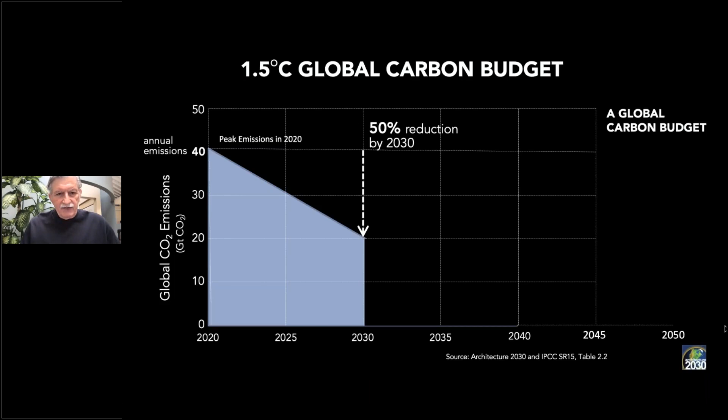Most scientists are calling for a 50% CO2 emissions reduction by 2030. If we follow that line down, if we meet that target, then we phase out CO2 emissions by 2040. That gives us a 67% chance of meeting the 1.5.

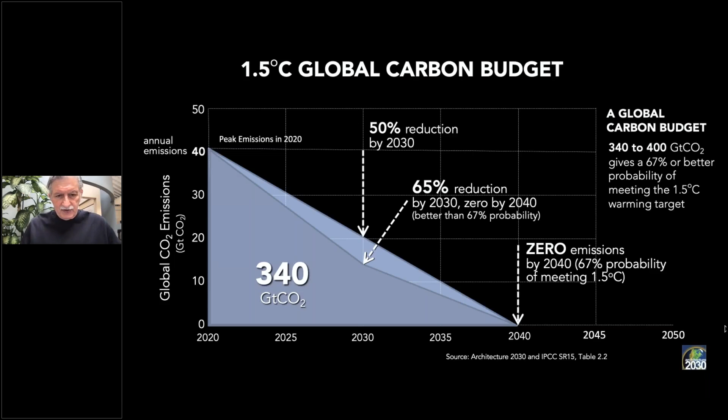That's a good probability. And we think the building sector, our sector, can do even better. We can reach a 65% reduction by 2030 and phase out all emissions in the building sector by the year 2040. So a 50 to 65% reduction by 2030 works, and then a phase out by 2040. That's our carbon budget.

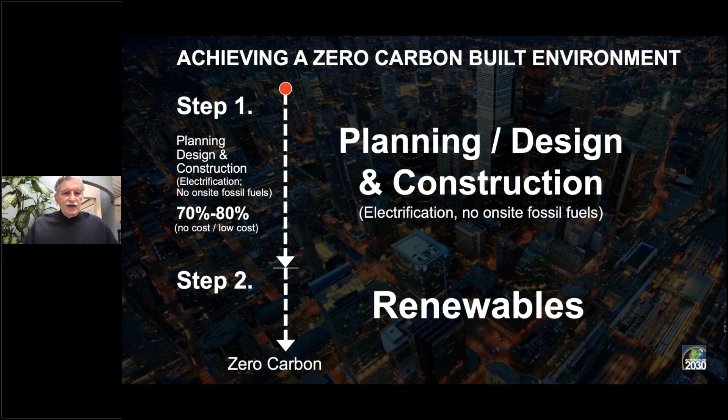So how do we achieve a zero carbon built environment? That's buildings and the infrastructure that goes along with it. Well, it's a two-step process. Step one is planning, design, and construction. It's what we do. And there we call for electrification, no on-site fossil fuels. Step two is adding the renewables. If we do those two things, we get through planning and design 70 to 80% of the way there. And then step two, we add the renewables, we can get to zero carbon.

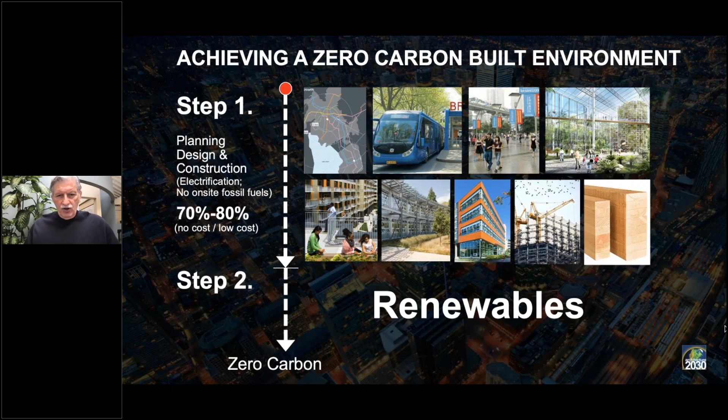So how do we do that? Well, if we plan correctly, for example, establish growth boundaries so we're not increasing the infrastructure, infill, use public transportation, bring urban agriculture back into the city, design buildings using passive heating, cooling, and daylighting systems, and then use the appropriate materials, reducing the embodied carbon of materials, and even using carbon sequestering materials, we can get 70 to 80% of the way there just through design strategies, no cost or low cost options and strategies that we have.

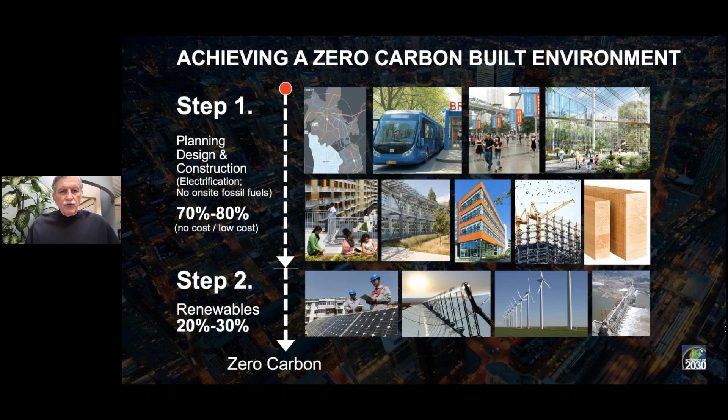And then step two, we then need to power the rest of the building's needs with renewables, and that's on-site renewables or bringing in electricity, for example, from offsite locations that are powered by renewables. So that's how we get to a zero carbon built environment.

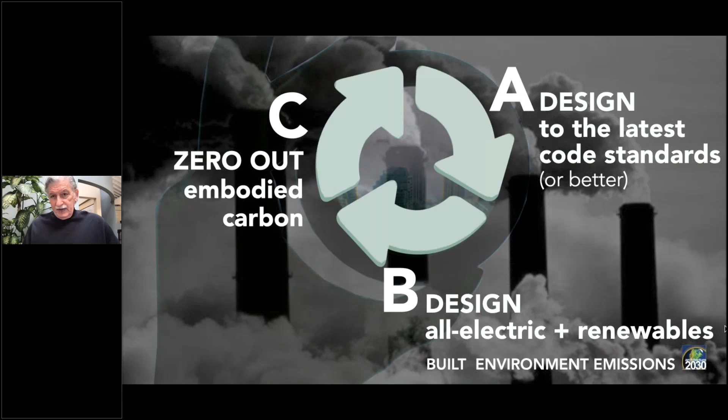So how do we actually do it? Well, there are 3 steps to doing it. Step A: design to the latest building code standard or better. Why? Well, first of all, we have zero carbon building code standards that get us very, very low carbon operating energy. ASHRAE 90.1 2019 is an excellent code.

The IECC 2021. China has a nearly zero energy buildings code, plus on-site and off-site renewables. Many European countries now are required to get to nearly zero energy plus on-site and off-site renewables. So we have the standards out there, we have international standards. And if we just design to the latest code standard, then we get a very efficient building.

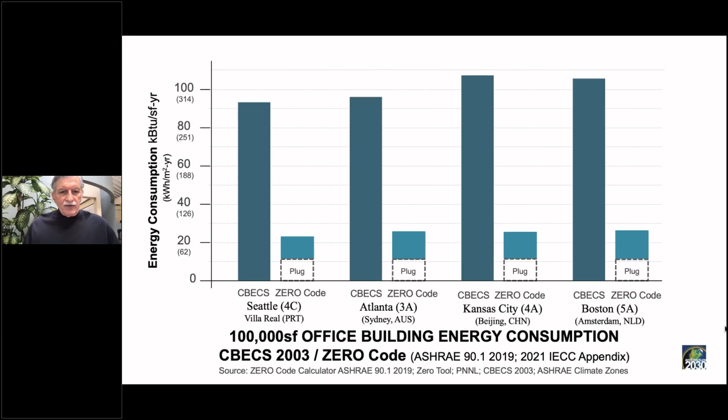So the part that the code addresses is a very small portion. We can easily address the building's energy consumption because it's very low with renewables. The first thing is to design an energy efficient building using at least the latest code standards, and then do all sorts of things to reduce it even more—look at the envelopes, make them more efficient, daylighting strategies, passive heating, cooling, and ventilating strategies that don't cost anything can bring efficiency way up and energy consumption way down.

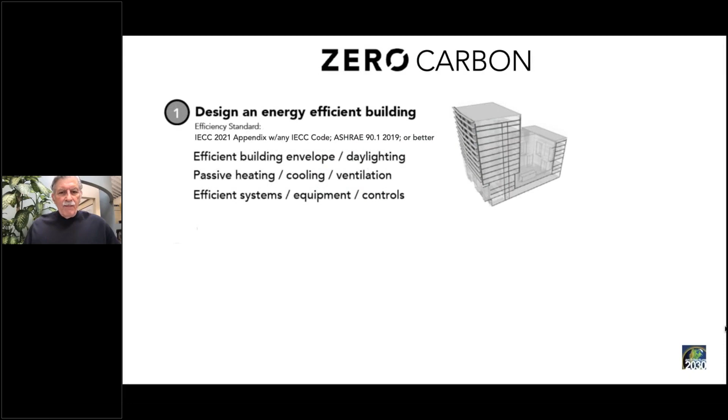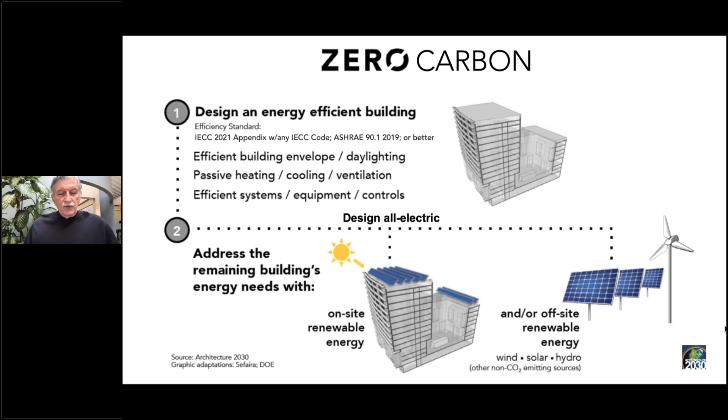The second thing we need to do is design all electric, plus renewables, no on-site fossil fuels. We design all electric, address the remaining building's energy needs after we've designed an efficient building with either on-site renewable energy when we can, or bring in energy off-site from renewables. We insist on renewables—that gives us a zero carbon building.

What about all the existing buildings out there? The formula is the same. When we renovate them during renovation cycles, we can make them more efficient, get rid of the on-site fossil fuels, electrify them, and then bring in on-site or off-site renewable energy.

And we discovered something really interesting. This is an aerial view of New York City, and you can see in those red circles where all the big buildings are—over 50,000 to 100,000 square foot buildings in Midtown Manhattan, downtown Brooklyn, downtown Manhattan. Those small circles represent only 2% of all the buildings in New York City. It's a very small number of buildings.

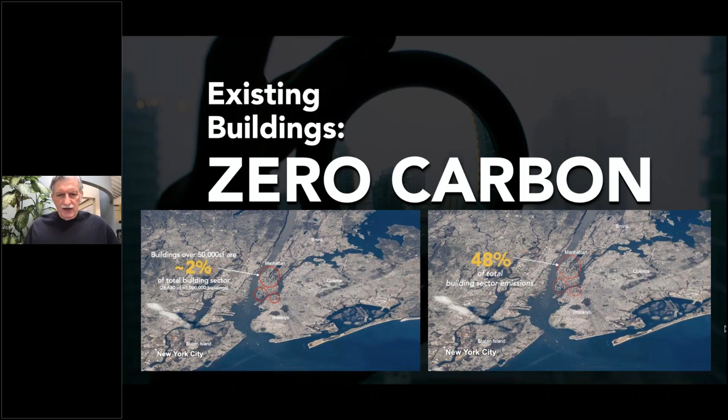That small number of buildings is responsible for 48% of all building sector operations emissions. It's huge—a very small number of buildings responsible for a huge portion of the city's building sector emissions. We can see the same thing in Chicago along the waterfront: very big buildings, then miles and miles of small buildings.

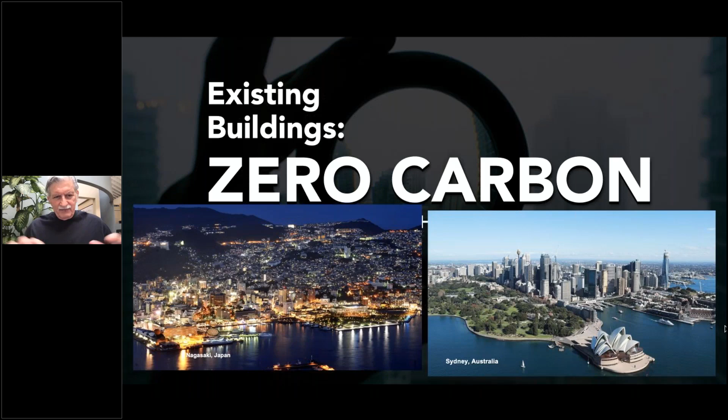Same thing in Philadelphia, same thing in Guangzhou, same thing in Istanbul, Turkey—downtown areas with some huge buildings, then lots and lots of smaller buildings. You can see the same thing in Nagasaki, Japan, along the waterfront: huge buildings, and then in back of it miles and miles of small buildings. Same thing in Sydney, Australia.

Based on that, we can develop a two-tier, two-part strategy. First, with the big building emitters—there are very few of them in each city, but they're responsible for almost half of all emissions. So we work our way down from the biggest buildings until we get to half of emissions. It'll be a relative handful of buildings, and we require them to get to zero carbon by the year 2030.

We provide incentives for them to do it. They'll usually hit a capital improvement cycle, so it'll be inexpensive to get rid of on-site fossil fuels, electrify, and use on-site and off-site renewables. We can give them low interest loans, tax abatements—there are all sorts of things cities and local governments can do.

And then we require all the rest of the buildings to get to zero carbon by 2040. We give them more time—these are the smaller buildings. We look for times when they're going to undergo a renovation. So getting to zero is not that difficult and doesn't cost very much.

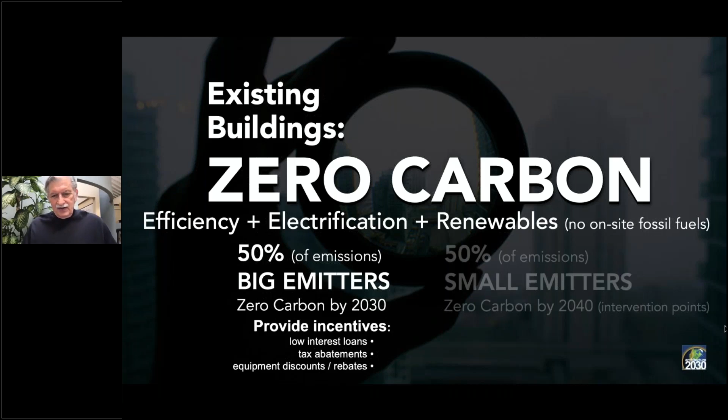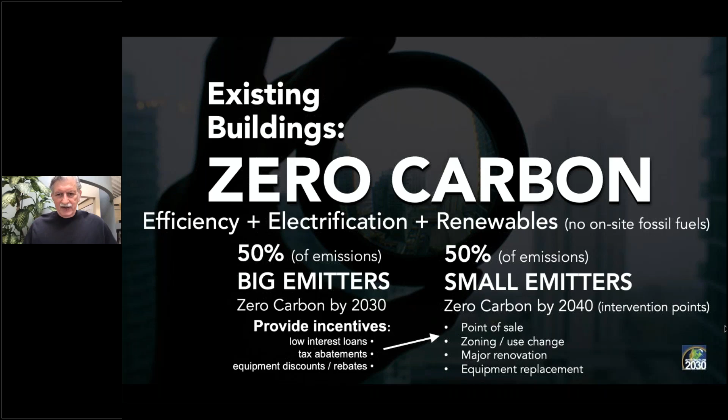At point of sale, a zoning or use change, when they undergo a renovation, or when they're replacing equipment—replace it with more efficient equipment, electrify, and get rid of on-site fossil fuels, and give them the same incentives to do that. If we do that, we can transform the entire existing building sector to get to zero carbon by the year 2040. And then last but not least, we have to zero out embodied carbon.

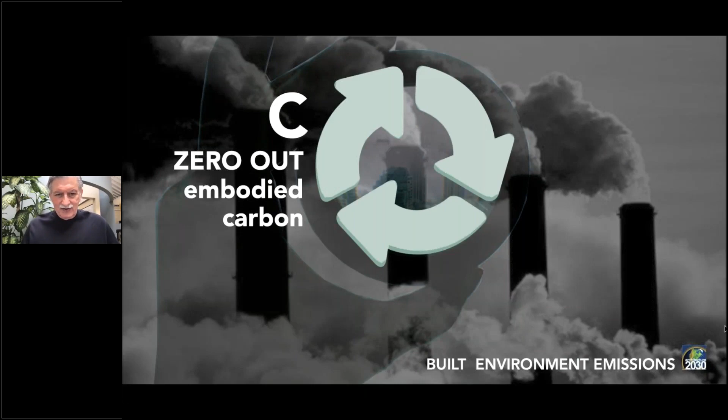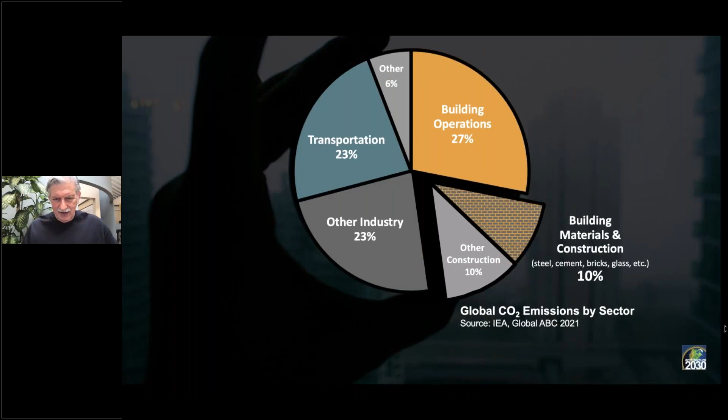All the materials and construction that goes on in the building sector—there are literally hundreds of thousands of materials we can choose from. So how do we zero out all that? We discovered something interesting. Here's the way we usually see global emissions now. And if we reconfigure the industrial sector, we see that just two materials, concrete and steel, are responsible for almost half of all emissions in the industrial sector.

Most of that concrete and steel and emissions come from building buildings and all the infrastructure that goes along with buildings—the roads, the site work, the parking lots, the bridges. All of that is attributed to the built environment.

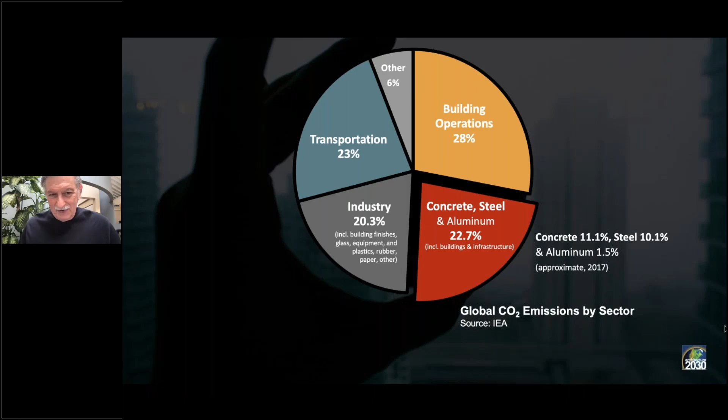So just two materials are responsible for half of all industrial emissions, and if you throw in aluminum, it's over 50%. You have two materials, and then hundreds and millions of other materials and products. In a building, it's the structure, the concrete and steel, that makes up 50, 60, as much as 75% of the total emissions of building the buildings.

If you renovate a building, you don't have to build all that new structure. Keeping existing buildings and renovating and reusing them is really the greenest building. It's the one you don't have to build—it's already been built.

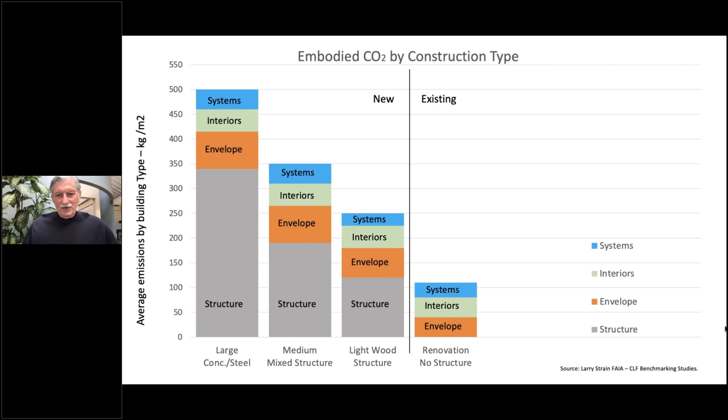So now what? How do we get a handle on steel and concrete and then all these other materials? Well, the first thing is we have to change the conversation. And that conversation has been changing. Recently we discovered that steel and concrete was responsible for this huge amount of emissions, followed by aluminum and glass. We're starting to see that now in mainstream media.

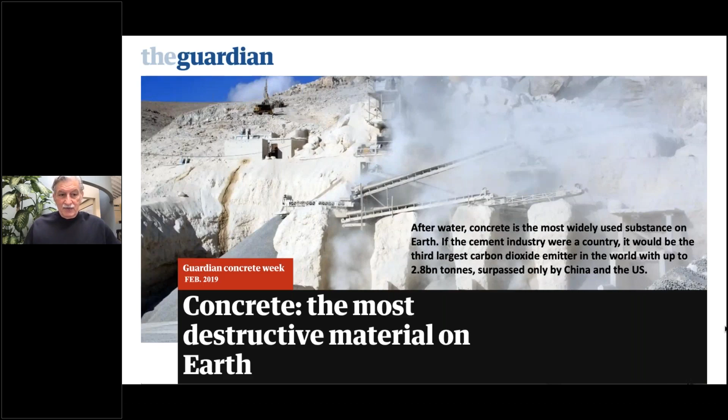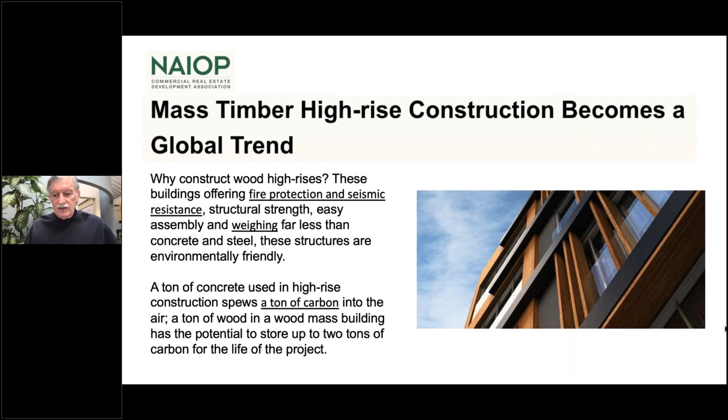Concrete, the most destructive material on the planet, from The Guardian and Bloomberg. Steelmakers next in the crosshairs as climate pressure grows. And there's an alternative: mass timber. We can use mass timber, cross-laminated timber, glue-laminated timber. We're starting to see now cross-laminated, glue-laminated bamboo in the global south being discussed. This gives steel and concrete competition, so it incentivizes them to change and become low carbon.

So what can we do in the design, planning, and architecture professions? We can look to reuse when we can, reduce and sequester carbon. Let's look at reuse—like I said, the greenest building, development, or neighborhood is the one that's already built. If we can repurpose and upgrade urban areas, that's better than tearing them down and building new. When we can do that, we can also renovate existing buildings through adaptive reuse.

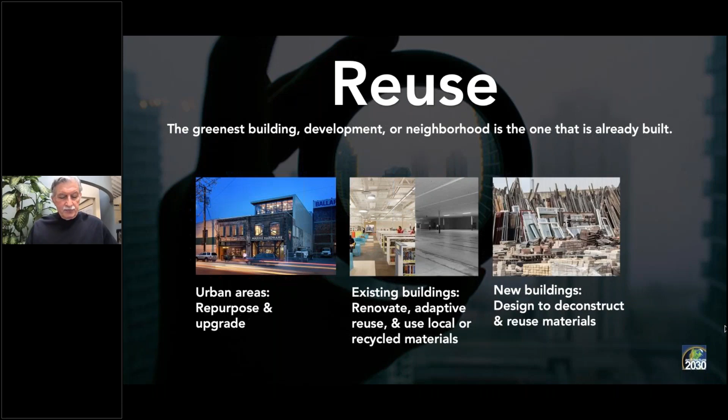We'll see a lot of that because of COVID, and use local or recycled materials. And if we do design new buildings, then we can design them to be deconstructed later on after their usable life, to reuse materials. That's becoming now an option within the architecture profession.

The second thing we can do is reduce, by establishing growth boundaries and infill. There's usually a tremendous amount of area that can be infilled and densified. We know that's not a COVID spreader, by the way—it's overcrowding. So we can infill and save all that infrastructure.

We can optimize structure—we usually over-design now anyway—and then we can specify low carbon materials. We're calling for an immediate 30 to 40% reduction in our specifications when we specify materials, and then a 50% reduction by 2030, zero by 2040. But we should get concrete and steel to zero carbon as quickly as possible, preferably by 2030.

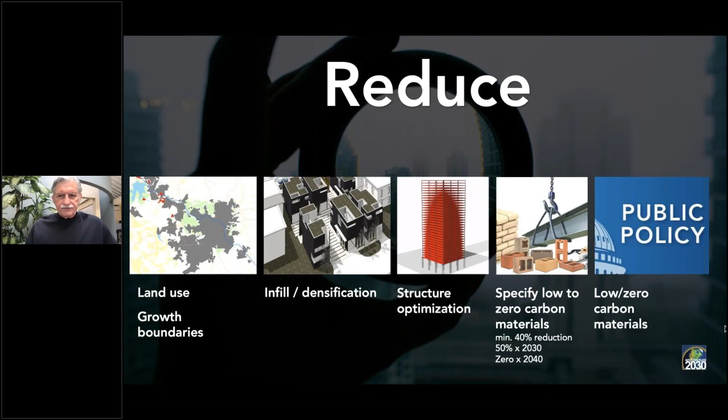We're beginning to see public policy now come into play with that. And the last thing we can do is sequester carbon—use sustainably managed forests, sustainable glue-laminated wood, and possibly bamboo. We're beginning to see the concrete industry and steel industry change. There's carbon positive aggregate now for concrete, injecting CO2 into concrete and changing its properties, so we reduce the amount of CO2.

Going to electric arc furnaces and renewable energy for making steel with recycled steel, using biomaterials with renewable energy to actually make the materials, and then sequestering carbon in landscapes and soil and site work, and bringing agriculture into urban areas can also sequester a huge amount of carbon and reduce transportation.

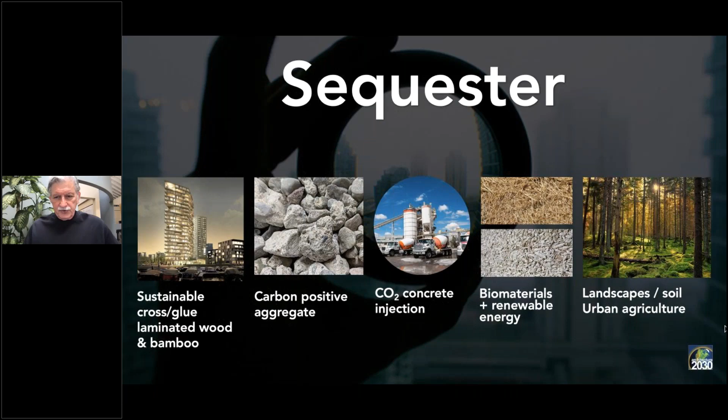So how fast can we make this change? We have to make this change really in the next 18 to 20 years.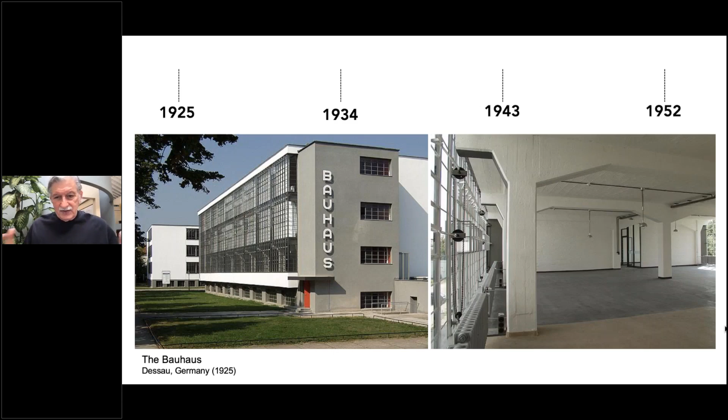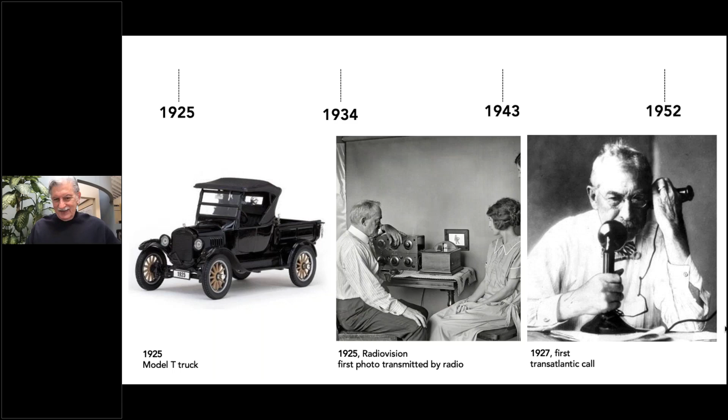That was in 1925. What was going on back then? Well, you can see things were pretty primitive in 1925. We had Radiovision, we didn't have television. We had the first Model T truck, for example. You couldn't make calls overseas. We didn't have cell phones, obviously. It wasn't until 1927. So things were pretty primitive back in 1925.

Well, in 1928, conditions were really bad. The architects, the leading architects and planners and designers got together and held the first international Congress of Modern Architecture.

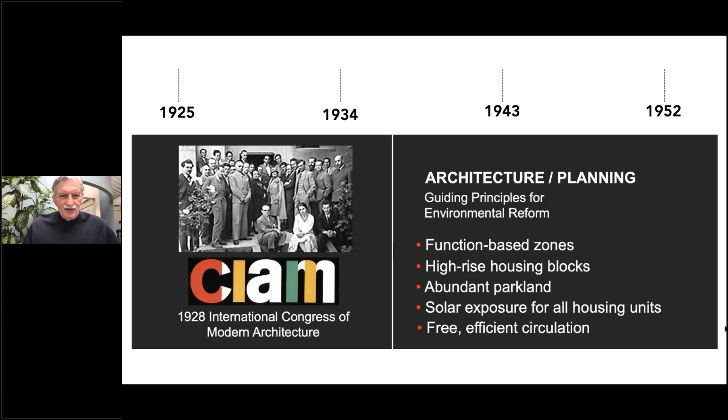And they were responding to terrible conditions in Europe during the beginnings of the Industrial Revolution. Housing was in the industrial areas, and pollution from burning coal, for example, was terrible. People were dying early.

The architects and planners and designers got together and set out guiding principles to get housing out of the industrial areas. They called for function-based zones and high-rise housing blocks and abundant sunlight, solar exposure for all housing units, putting the housing units in parkland, things like that.

So they set out these utopian principles, essentially for environmental reform. And Le Corbusier then set out the 5 principles for a modern architecture: column wall separation, get rid of the

bearing walls, for example, or free up the facade so that you can open it up and open up windows to the outside. The horizontal window, free up the design of the plan so we can have flexible space. And he called for roof gardens, actually replacing the vegetation we took by building the buildings and putting it back up on the roof. Interesting.

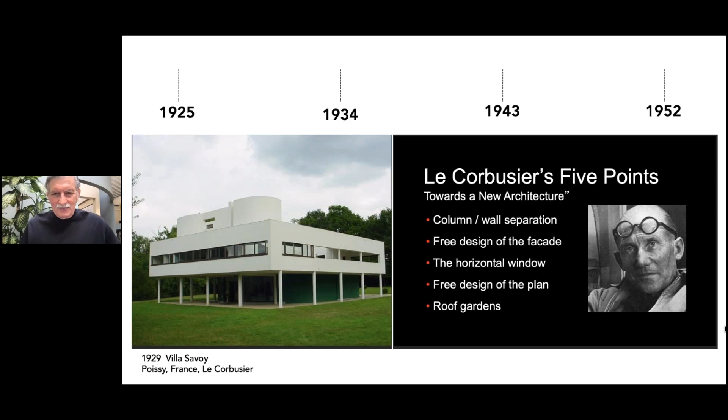So all that happened in 1928, 29. By 1932, that European movement of modern architecture came to the U.S. in an exhibit called the International Style.

And the reason being, you could take that building type, that modern building, and put it anywhere in the world because we have fossil fuels, they were cheap. You can climate control any space. So by 1939, you could see the beautiful Johnson Wax building, big open floor space with column loads.

By 1949, you had the all glass house in a very, very cold climate, a single glass, all glass house in a cold climate in Connecticut, New Canaan, Connecticut, the Philip Johnson Glass House. It was demonstrating that essentially we can build all glass and climate control the building to where it was comfortable because we had fossil fuels and cheap fossil fuels.

By 52, you had single glass high-rise buildings throughout the world. So here's the beautiful Lever House. And then by 56, you had entire new cities planned on the modern principles.

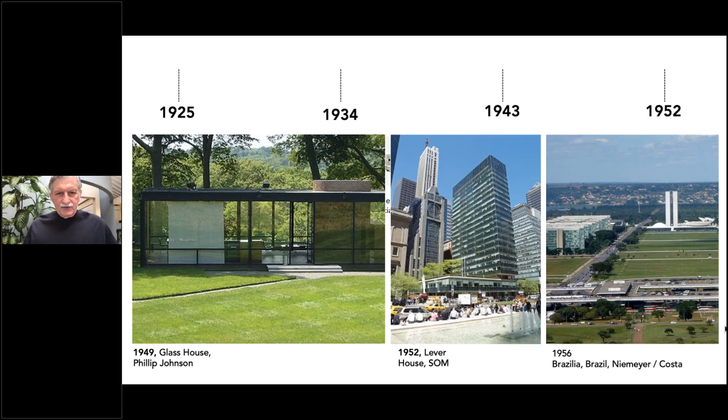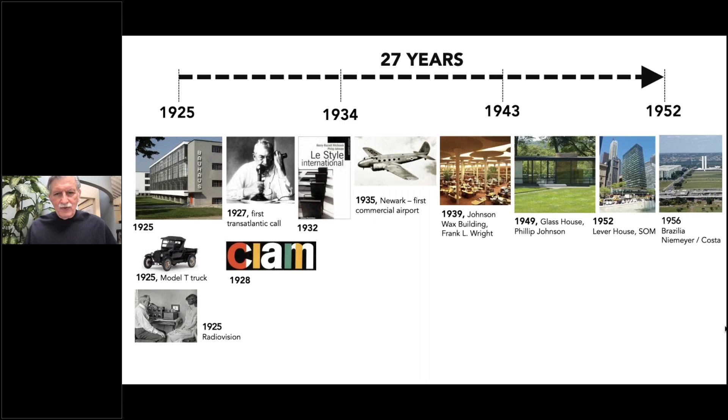So how long did it take to go from the Bauhaus to the Lever House? From 1925 to 1952 was 27 years. We changed the world in 27 years with these primitive tools that we had, T-square and triangle.

It took years to do a set of construction documents. We had to dip a pen in an inkwell in order to draw, and we didn't have erasers to erase the ink. We had to scrape it off a drawing with a razor blade. This is how we changed the world in 27 years.

You couldn't do a curve because you couldn't dimension it. So you had French curves, but you couldn't dimension it and put it in 3 dimensions. So everything was rectangular. Every building in the world during that period pretty much was rectangular.

It wasn't until 1960 that we actually got a pen to draw with, a rapidograph. And the first laptop didn't come in until 1991. So we changed the world in 27 years with these primitive design tools.

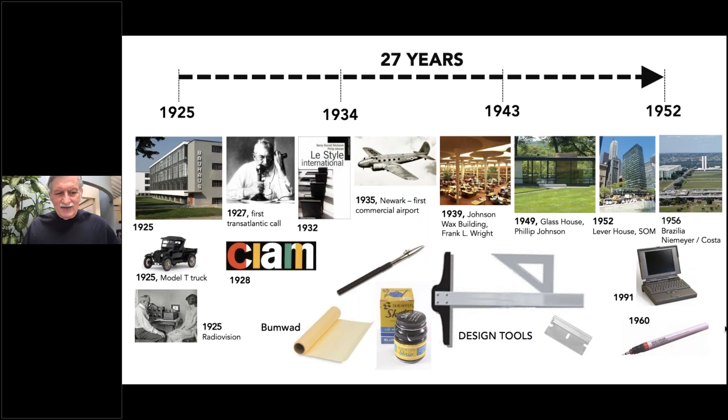We have 20 years now, roughly, from 2020 to 2040 to meet the 1.5 degrees C target to phase out all emissions. So at COP26 in Glasgow, we called for a 50 to 65% reduction for our sector and all sectors, at least a 50% by 2030.

If we meet that, we will be on a path to zero out CO2 emissions by 2040. And organizations, all the major organizations came together along these lines, calling for the 50 to 65% reduction by 2030, zero by 2040.

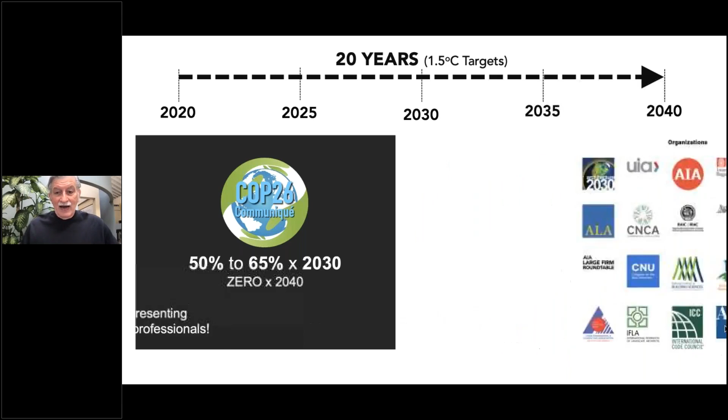These are all the design professional organizations and planning organizations representing over 1 million design professionals came together and aligned along these targets and are now working so that our professions meet these targets, so that the building sector and the built environment meets these targets.

And 60 to 70 of the largest firms in the world, responsible for over 300 billion in annual construction, has also signed on to what we call the COP26 communique to meet these targets, and will work within their firms to do the same.

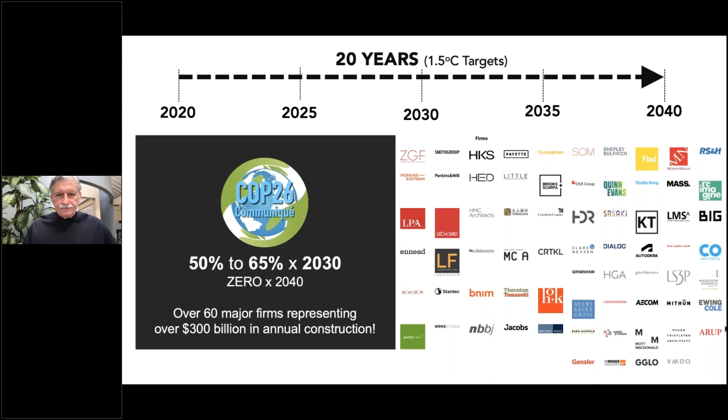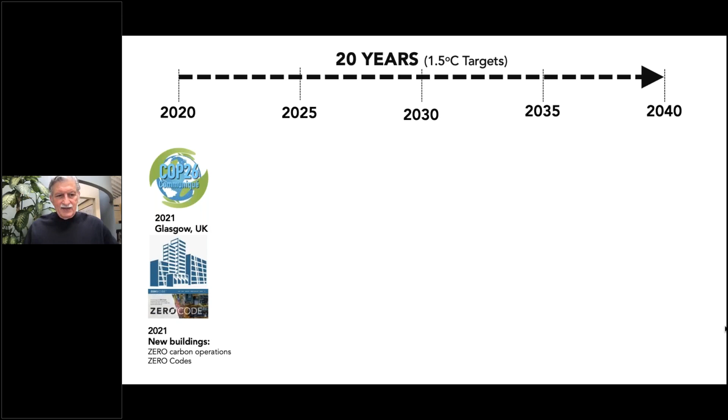So what does that all mean, and what does our flow chart for the next 20 years look like? Well, we issued the communique in Glasgow this year, and we called for all new buildings to be zero carbon operations and to at least design to the ZERO Code standards.

By 2025, we call for a 50% embodied carbon reduction in steel and concrete. And by 2030, zero carbon steel and concrete. All other materials, then a 50% reduction we're calling for by 2030 in embodied carbon.

And by 2030, we should have all big buildings, those responsible for roughly half of a city's building sector's emissions, at zero carbon building operations, electrify them, and bring in on-site or off-site renewables to operate them. So that by 2040, all buildings then built will be zero embodied carbon, and we'll renovate the remainder of the small buildings to zero carbon building operations.

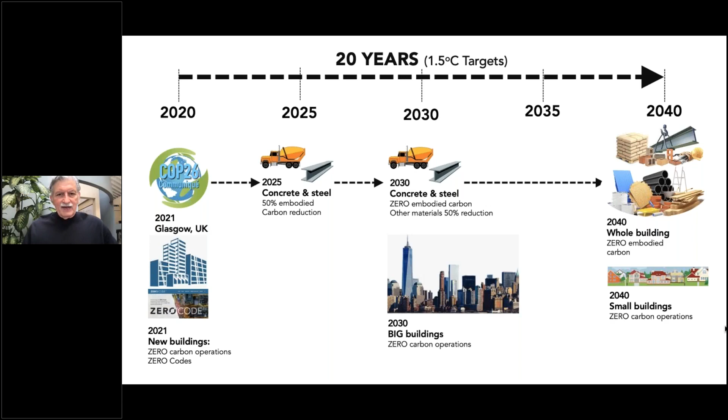This is what the flow chart looks like to meet 1.5 degrees. It is not that difficult. Why? Because look at the tools we have. We were using ink pens that we dipped in an inkwell to do drawings back when we changed the world in 27 years.

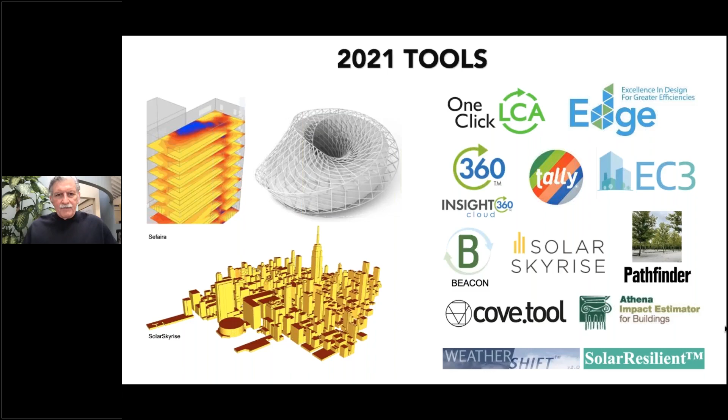We have now roughly 20 years, and these are the tools we have. We have simulation tools. We can look at daylighting strategies, passive heating and cooling strategies, solar. We can look at solar opportunities, and also solar energy is now the cheapest electricity in history. That happened a year ago - it became cheaper than any other fuel source.

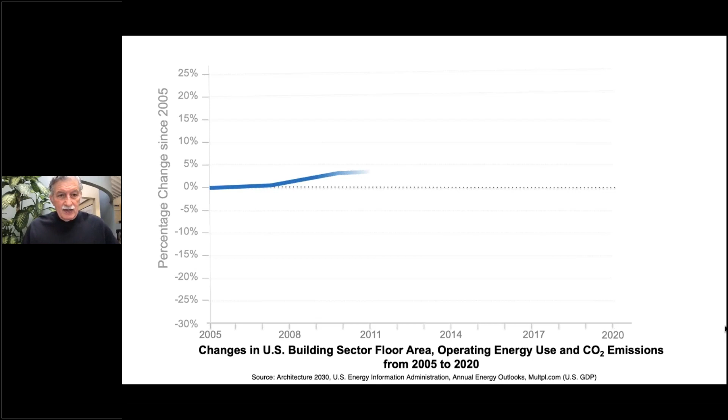So what's going on in the US and then globally? In the US, from 2005 to 2020, obviously floor area increased. We keep building. We added 53 billion square feet to our building sector. We increased our building sector stock by almost 20% since 2005.

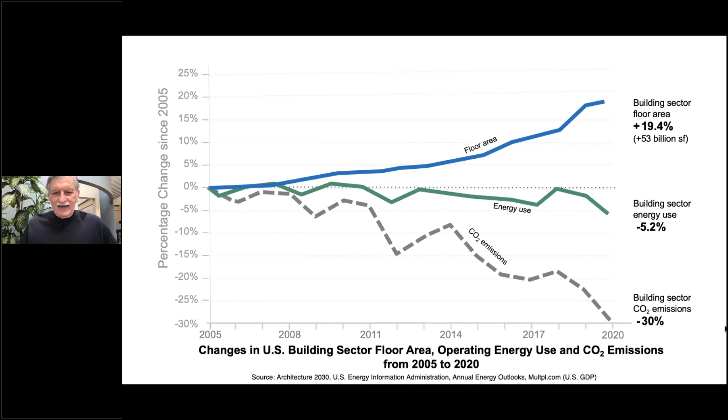Even though we were building more buildings, we were bringing them in more efficient and then renovating, so that we actually did not increase any energy use in the building sector. We reduced it by 5.2%. But look at emissions - emissions has gone down 30% in the building sector in the US, and that's due to cleaner fuels. That decoupling from building more and reducing emissions is unprecedented in US modern history. It never happened before. But we show not only can it be done, it's saving consumers money.

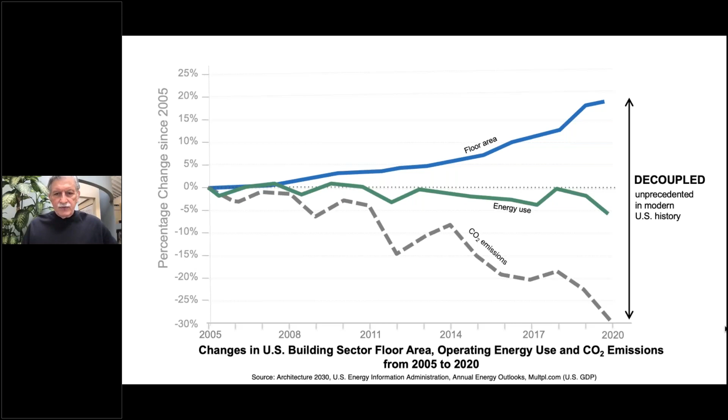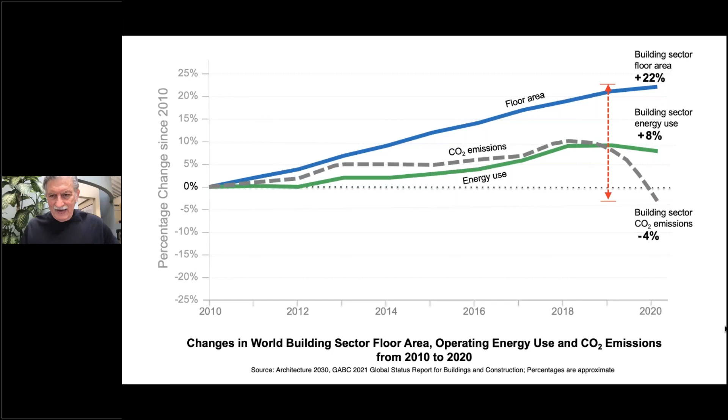But look at CO2 emissions. In 2018, 2019, all of a sudden, CO2 emissions dropped dramatically. And why has that happened? Well, first, we're seeing a decoupling now. What has taken place in the US over the last 15 years is now beginning to take place globally, and that's good news.

And why is that happening? Because in 2020, why did we see that huge drop? In 2020, renewable power was the only energy source for which demand increased while consumption of all other fuels declined, says the IEA, and they see that as being the new normal moving forward.

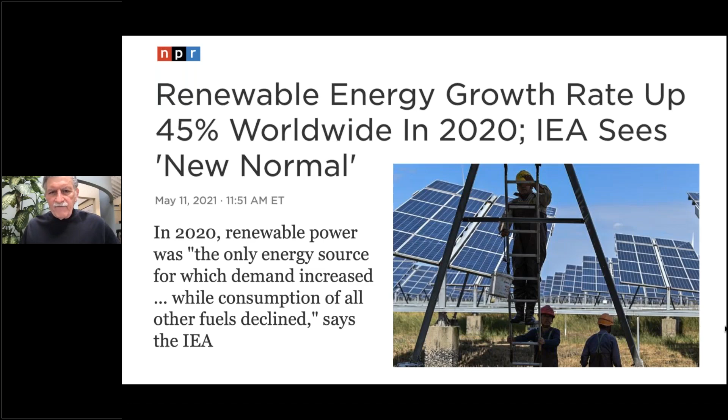That is good news. So we need to make every single building redesigned zero carbon from here on out. It is not that difficult to do. If we do that and we renovate the existing building stock and address our building materials, use alternatives, use carbon sequestering materials, we will keep 1.5 degrees C alive, because we're responsible for almost half of all global greenhouse gas emissions. Thank you very much.